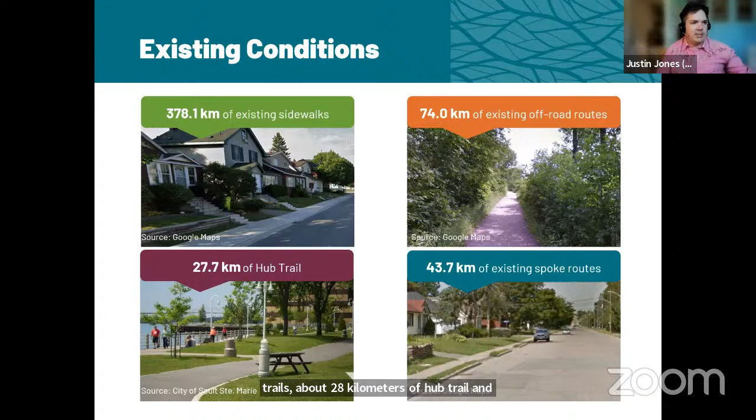I'll try to go quickly through, because I know you have a very busy agenda. We reviewed all of the existing conditions for the city and found there's about 380 kilometers of sidewalks, about 74 kilometers of off-road trails, about 28 kilometers of hub trail, and about 44 kilometers of spoke routes. Those are the kinds of facilities we're looking at in terms of existing conditions when we show the mapping here.

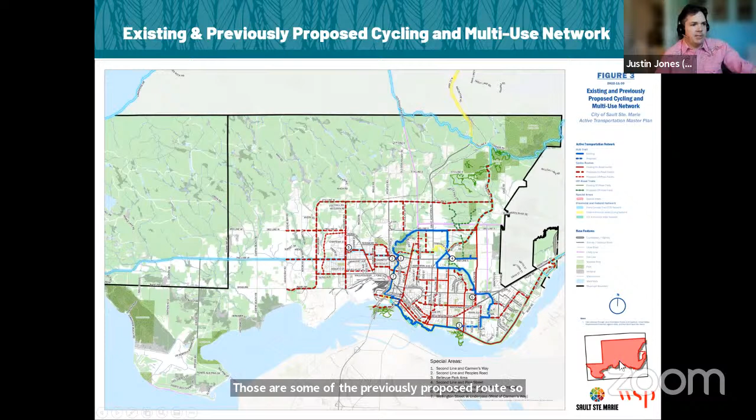This map shows an overlay of all the different types of facilities already in existence in Sault Ste. Marie, and the dashed lines show any of the proposed routes - some of the previously proposed routes, whether through the cycling plan or the transportation master plan, showing all of the ones that have been previously considered. We also show the previously proposed and existing pedestrian network. What you'll notice is that the pedestrian network is a little bit more well-defined and robust than the cycling network, which I think comes from the policy of the city when it comes to sidewalks.

In terms of the potential for active transportation in Sault Ste. Marie, we want to make sure that when prioritizing routes across the city for the active transportation plan, we're designing with safety and accessibility in mind first, creating connections and continuous routes, identifying routes that are feasible and actually constructible. We don't want to identify something that can never be built based on the constraints of the corridors. We want to support multimodal needs, connecting to transit facilities and providing space for all users, and we want to connect to key destinations. Those are really the key elements and criteria we're using to get to our candidate route network.

The candidate route network is twofold here - we're showing the pedestrian network first. This map demonstrates all of the different pedestrian connections and the proposed sidewalks that we are looking at carrying forward within the active transportation master plan, to better connect some of the existing sidewalks with destinations that are important to residents of the city, with a specific focus on schools.

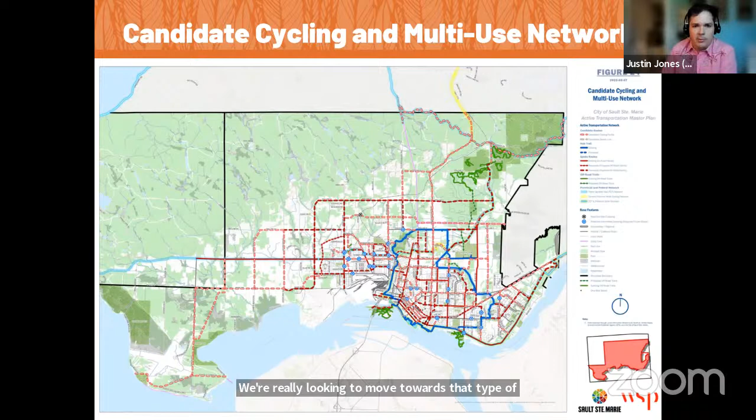So with that, I really just want to open it up to you and ask, is there anything that's missing? I know it's kind of like trying to drink from a fire hose when I do presentations like this, but I'm trying to fit everything into your agenda, so I'll leave it there for all of you.

Derek: This is Derek Lavalley, I'm a member of the committee. I just wanted to know, if there was a lot of construction at some point and we couldn't get around in our wheelchairs, is the trail—just because it says bikes—can a wheelchair get on the trails? If there was a barrier and I had to go around and there was a bike lane there, could I get on the bike lane, or is it just strictly for bikes?

Thank you for that question. One of the trends we're starting to see is more focus on what I'll call mobility lanes, rather than just bike lanes. For example, the most recent design guidance from the National Association of City Transportation Officials, NACTO, which provides design guidance for all of North America, has recently published a report called 'Designing for Small Things with Wheels.' The idea is that any wheeled mobility device—a mobility scooter, an electric kick-style scooter, a bike, an electric bike, a wheelchair, a powered wheelchair—those human-scale devices would be designed to be accommodated in those facilities.

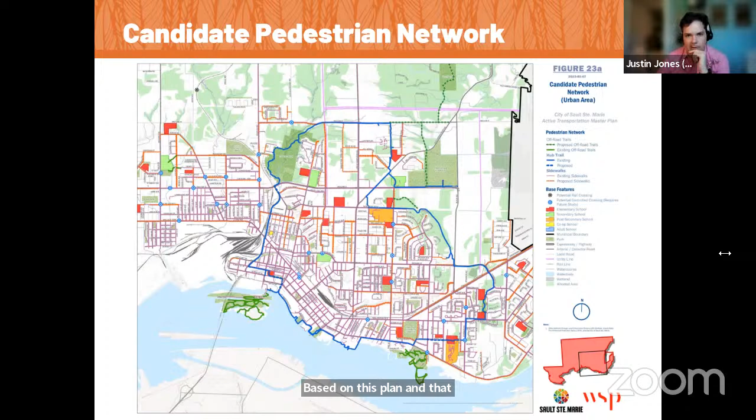So just to clarify, basically any sidewalk is going to be city responsibility, since those are within the municipal right of way. So it would be on the city for those investments, and that holds until you get onto the property of the school -- once you're on school property, that's where it changes. I know it's hard to see on this map, and we can circulate some higher quality maps for the committee after this session. But to be clear, if there was a school that didn't have a sidewalk leading up to it, we have essentially added sidewalks to every single one of them. There's not a single school that would be left without a sidewalk leading to it based on this plan. And that Sackville Road is included on our list already, just to circle back.

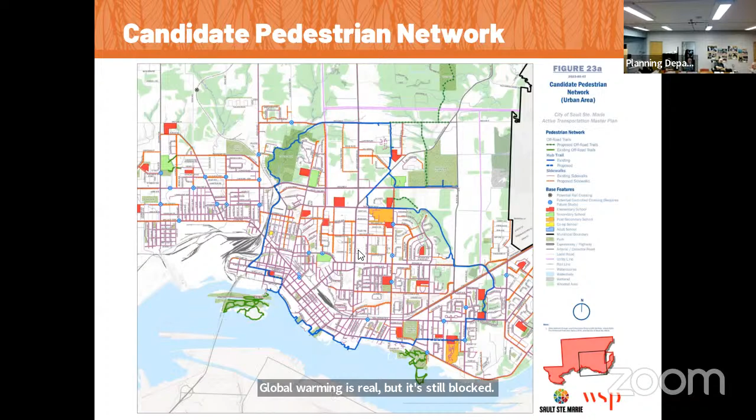Justin, general question regarding the plan and winter maintenance, snow removal. I know it's not what the recommendation... one of the things being in Northern Ontario, we have significant weather events fairly frequently, not as much as we did when we were younger. Global warming is real, but it still blocks part of the trail system, part of the sidewalks, the whole question of winter maintenance. How will that be dealt with within the plan? I know being a national company, you probably have weather concerns in other places, but this is something that we in the Soo still cope with quite a lot.

Yeah, and thank you for that question. That's one of the really key elements we want to look at as we go through this, in terms of next steps and what we're going to be doing. That's where it fits into this implementation strategy, talking about winter maintenance needs for the city. Our experience and the recommendations we usually craft into reports is for a municipality to start small, but really nail it when it comes to the level of service they're providing on winter networks.

So identifying a relatively small network of winter-maintained facilities, and having very high levels of maintenance service on those. Working closely with the operations department to determine where that capacity might exist, and ensuring a high degree of attention is paid to the conditions of those particular facilities. Then measuring, monitoring, and reporting back on how it's worked, and potentially expanding it out as more people start using it.

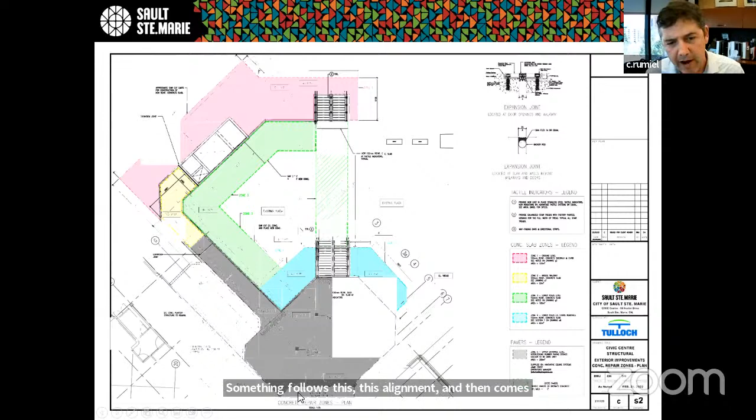So essentially, as City Hall exists right now, there's a long wheelchair ramp that follows this alignment, and then comes up the side of the building, and then another second accessibility ramp that goes to the front doors. The front doors are in this area right here. Everybody can see the arrow I'm circling.

So we are replacing that ramp - it does not meet current standards, Ontario Building Code or AODA. It's too steep to replace the ramp to a standard that would satisfy that. It would probably have the ramp ending somewhere past the flags in the front yard there. So we had to come up with a different solution.

So this right here is an exterior elevator. Essentially, we'll talk about 3 different elevations that the end product is going to look at. We have the parking lot elevation - leave a vehicle in the parking lot through a wheelchair ramp.

This is the lower vestibule of the elevator. You'll enter the elevator from this side. This is the elevator here, and then at the upper level - you'll see this better in the renderings - you'll leave from a second vestibule entering at what I'll call the Civic Centre second floor elevation.

So this elevation will be - there's no grade leaving here, there's no ramp. It's just one elevation straight into the building, where you'll meet security and determine where you need to go in City Hall, get on the elevator and go down to the next elevator and go to where we need to go. So that's how we're improving accessibility.

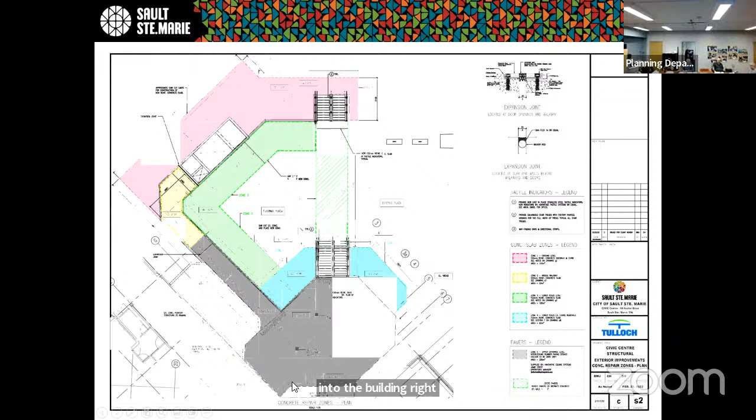So there is actually a set of stairs walking up into the building right now. This whole platform here, this elevation, will be the same as where you'd leave the elevator, and be raised, so that the last 4 steps, I believe, into the building are gone, will be gone. As well, on the lower platform level here, it'll be resurfaced with the existing stamped concrete, and the paving brick will be removed and replaced with new. The lower stairs will be replaced with galvanized stairs matching these ones. And that's essentially the project.

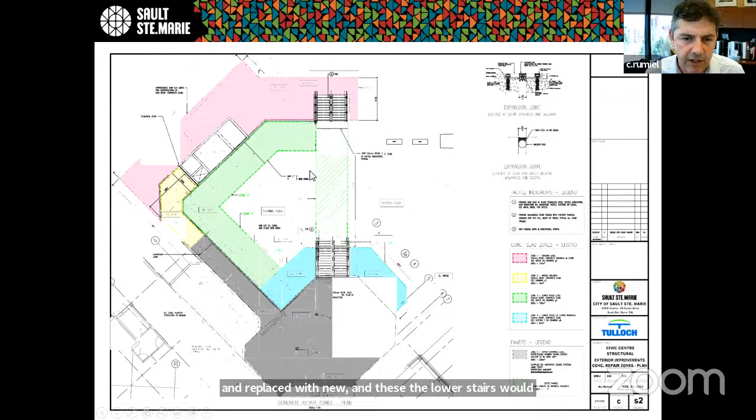So you see it a lot better in the renderings. You can see this would be the parking lot elevation right where I'm circling. These stairs are galvanized stairs with decorative railings up to this elevation here. There's a wall here keeping people on this middle platform from - it's quite a fall right here.

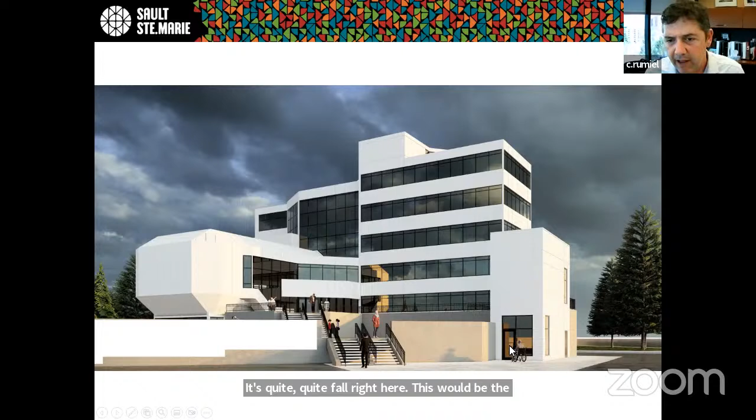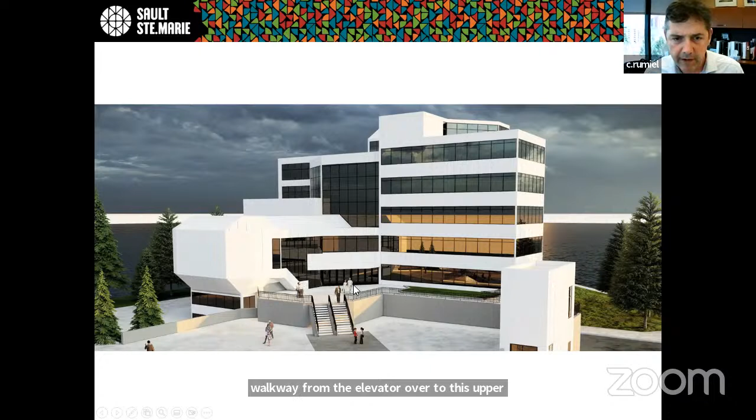This would be the entrance to the lower vestibule of the elevator, into the elevator up, and then exiting up. Secondly, you'll see that better in the next couple of renderings - it's just a little bit higher look. You can see the walkway from the elevator over to this upper platform area, and there's no last 4 steps going into the building here at the doors anymore.

So you get a sense of what it will look like. Looks a lot different without this wraparound set of concrete steps that we're continually putting a new coating on.

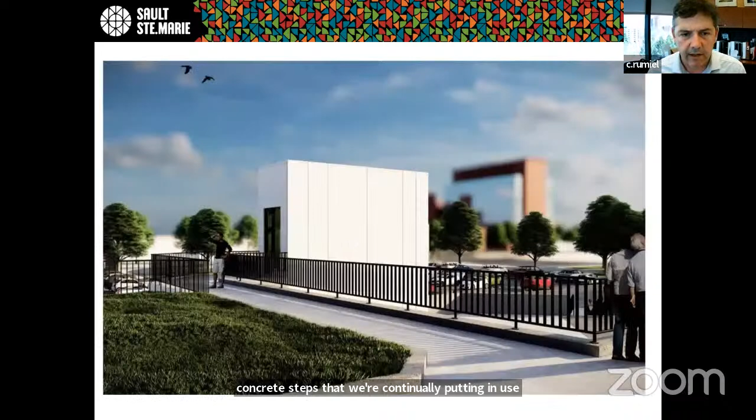And this is the exit from the upper vestibule of the elevator building. You walk through - again, this will be raised, the 4 steps that currently you'd have to walk up to the entrance. So this is all at 2nd floor elevation, so there's no bump entering the building. You just go from exiting the elevator, straight into the building.

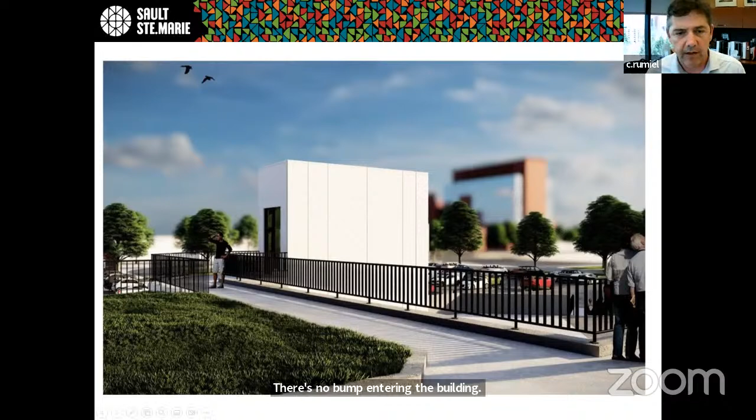This elevator building is a fully climate controlled, heated building. There's an entrance from the parking lot elevation to the upper platform elevation, with an automated door to get in and out of it. It's got the same exterior ACM panels that are on the Civic Centre now, so it will completely match.

And that is essentially what we've awarded last night. We have a couple of committee members with questions. Did you know that now most new elevators are voice recognition? Basically what they do is have a computer voice that tells the person where they're going, whether they're going up or down.

So when we get the elevator, if we can look at getting voice activation, as soon as you step in it'll tell you where you are and keep telling you the number. So if I'm on the first floor, it'll say ground, then it'll say number 3, 4, 5, 6, 7, 8. It also says to people, like if the wheelchair's hitting the door, it'll say please move from the doors. The hospital already has one - it's voice synthesized, so every floor we go on tells us.

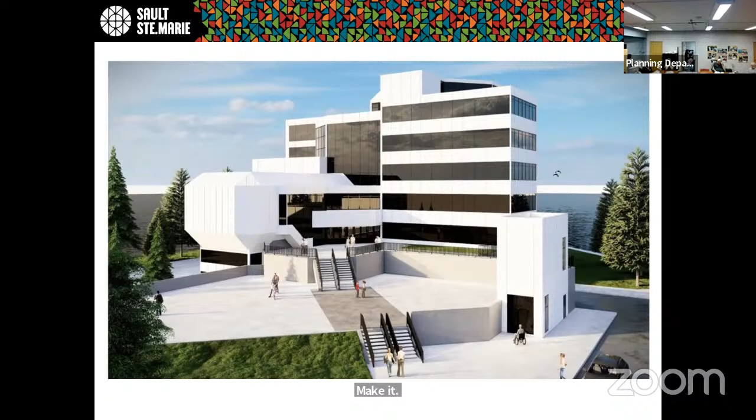So this elevator is heated, so they should be able to put the buttons or whatever to make it work. But I think when you say voice activated, Derek, is it when you push the button it says something? Yes, I think it does the same thing - it tells you it's going up. If I press 3, it tells me I'm on level 3.

And I believe, Carl, correct me if I'm wrong, this elevator only has two floors - it's either going up to the second floor or down to the first. Is it a lift or an elevator? Good question, I believe it's an elevator. I believe it's a hydraulic elevator, but I don't know, it's a little bit out of my wheelhouse, the elevator concept and construction. I'd have to check with the designer. Okay, now I've got a clearer picture of it.

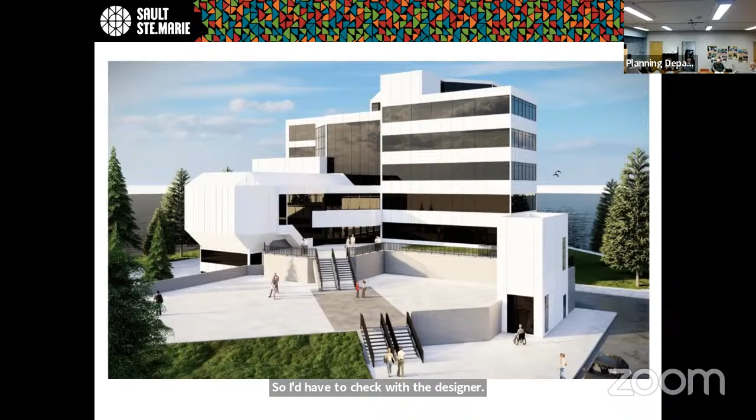I just wanted to reiterate what Carol said, which is, in selecting the final finishes, there should be some contrast so you can see where the panel box is with the push button, and also some contrast between the floor and the walls. That's probably a finishing issue, and we'd like a level of contrast for those.

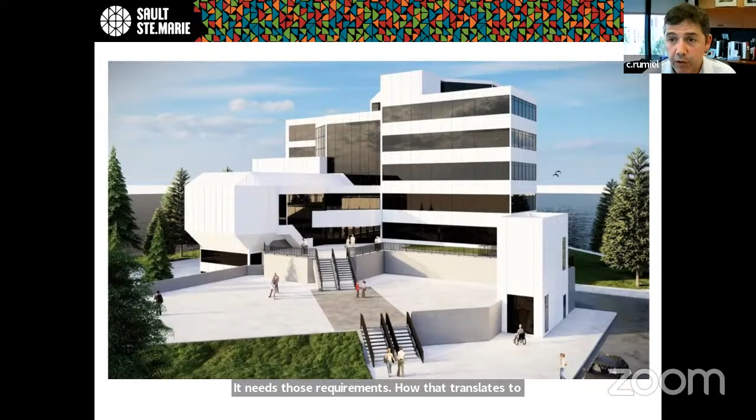As Peter said, everything was designed for section 3.8 of the building code and FADS. It meets those requirements. How that translates to the elevator and the fit and finish, I'm not sure, but I can review that. If something has been missed, or we can add something on relatively easily, we can do that before the contractor orders it. We just got approval last night, so.

Carl, if it's helpful, we can send you an email to that effect, and then you can forward it and see what the response would be. Yeah, I'll get some answers on the specs of the elevator. I suspect it's going to do most of these things, but I don't know for sure. Yeah, that would be good.

Craig, you have a question? Just a two-part question. On the entry to the City Hall main doors, now that we get to that level through the elevator, is there an actuator on that door present? Because I usually go through the west entrance. Automatic, oh it's already picked. Thank you. And will the west entrance be maintained? That's the one we presently use where the Parabus drops us off. I use City Hall often, as we both use it for the municipal elections and so forth.

So that other entrance will still be available? I think, and Carl, correct me if I'm wrong, like right now during a busy event like the elections, they'd probably have somebody at the west entrance because there's enough people coming and going that it can be a bottleneck. So for really busy events, you'll still be able to go through the west entrance and somebody will be there, because there's a door there now, right? It's locked and you need to pick up a phone and get somebody to come down. But going forward, I think this is the entrance that they want everybody to use.

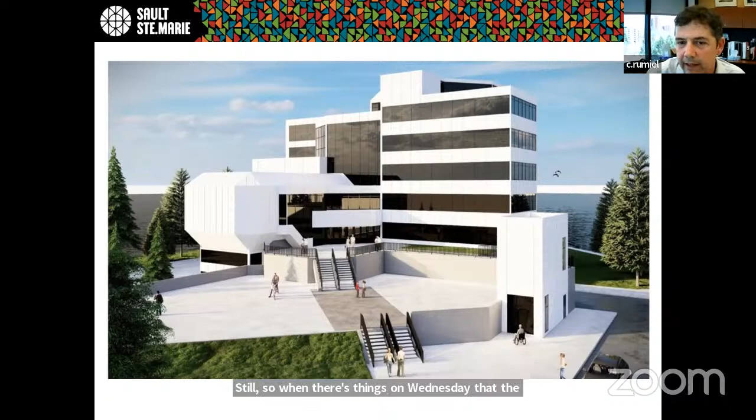Exactly, like I was thinking, after 9 o'clock or so, if you have committee meetings and events and security doing more regular routine checks, I would highly recommend having the elevator closed at that point. There's going to have to be consideration even for staff members who may have mobility issues. Don McConnell used to work at the city and he'd come in every Sunday. So there's going to have to be some way to contact security from that lower vestibule of the elevator.

Agreed, thanks Carl. Other questions or comments? I really like it, yeah, it's going to be good. It'd be nice to be able to go in the front door.

Carl, I have two questions myself. One is, do we know the size of the elevator? I'm just concerned because we have really large motorized wheelchairs, and for some individuals, is it a big elevator or a little elevator? You know what, Don, I could pull the drawings out right now and scale it, but how about I summarize that and give you guys the actual dimensions in response. I know it's been seen by the architect as big enough, so.

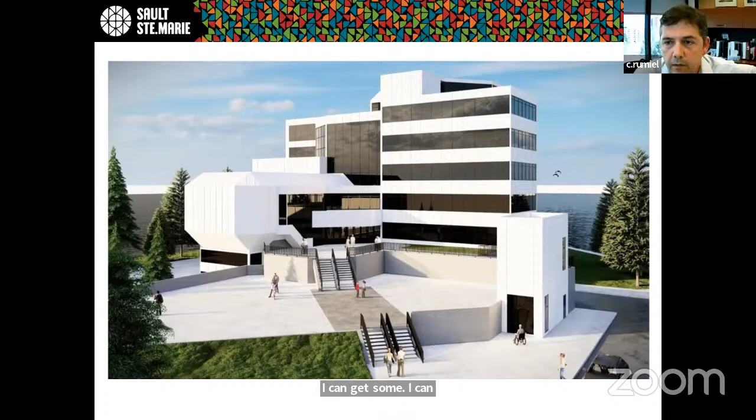My other question is, and I know there's a budget problem, I recognize that, but this is costing way more money than everybody thought it was going to. It seems kind of strange that we bring people into a heated, climate-controlled environment, bring them up in the elevator, and then put them back outside in the rain. Was there any thought to putting in a covered overhead walkway, so people getting out of the elevator walking to the front door of City Hall would be covered?

Yeah, we did look at that. It didn't make the final cut, just because of the distance from the elevator to the front door. There would be an opportunity at some point to put something in after the fact, just to break the wind, partway maybe to the exterior foyer. It's something we may look at in the future, but it didn't happen, not only for cost reasons, but it's a long distance and might look awkward, and it would cover up those nice new windows on the second floor that CSD looks out of now. I was thinking just a clear plastic covered canopy sort of thing.

Yeah, it's just a thought, for sure. Okay.

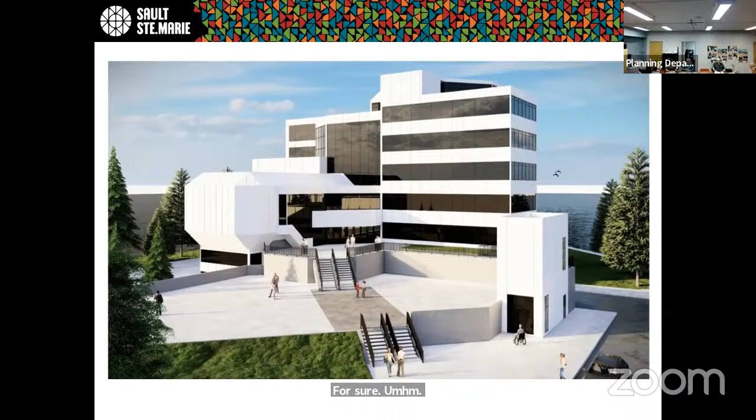Someone's going to have to get out and shovel it and keep it free of ice, right? Yeah, maintenance-wise it will be a challenge to keep that shoveled for sure.

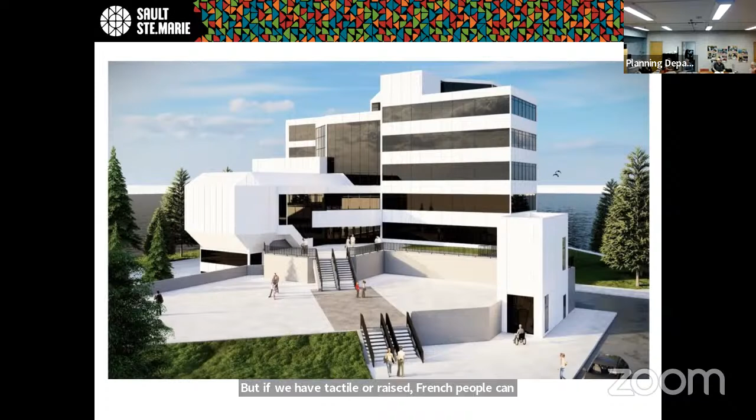Dan? Thanks, Carl. Just a couple of comments for accessibility. This is going to be new and it's going to take time for people to get to know this, so we'll need some signage, preferably signage that has braille and tactile markings. Some people read braille, it's not as common as one would think for people with vision disabilities, but if we have tactile or raised print, people can feel it and figure out it's the elevator. So that would be very helpful.

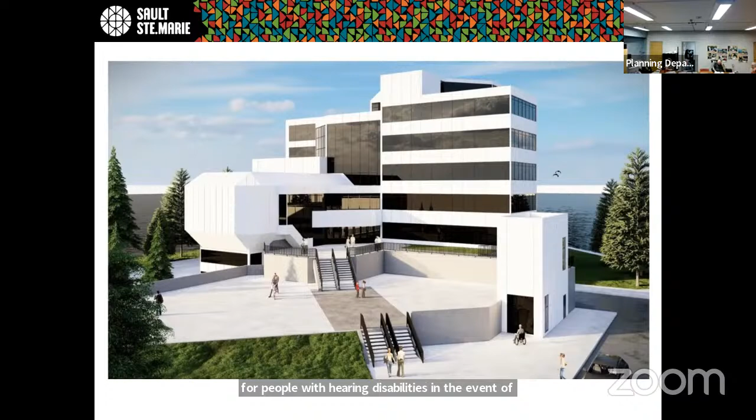The other thing I've just recently heard about is for people with hearing disabilities, in the event of a failure of the elevator, they can push the button and something happens where they can actually communicate with the other person via text. I'm not sure, but I think that may be part of code these days. I'll just add that in, if that's something that can also be looked at as well, okay?

If you guys are sending me a list, that'd be great. I could work with that and go get the answers you guys need.

That came up at council last night too. Councilor Collins as well, who I think sent us an email about this, more about the button, like the help button. Yes, we'll send you a list, Carl.

Thank you very much. I think I'd rather be stuck in this elevator than an inside elevator some day. I was stuck in an elevator last week. Oh, good thing I had my cell phone on me.

Is there anything else, or any comments or questions for Carl?

Carl, before I let you go, sorry for the incredibly short notice of about 3 seconds. I noticed that there are renovations going on in the lobby itself. Could you talk about those for a minute?

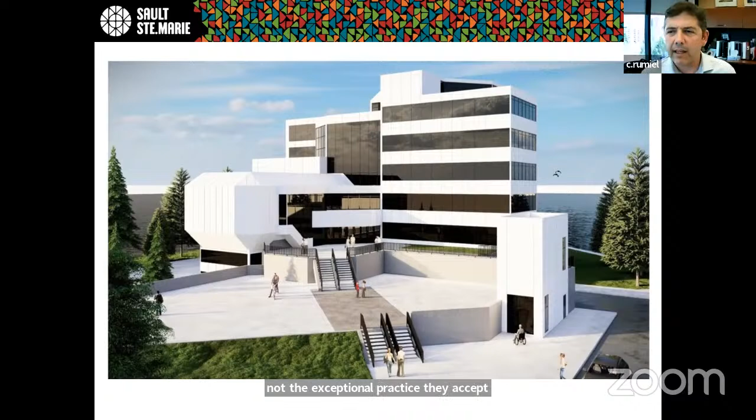It's been relaxed a little bit. You could probably find your way up to my office now, but you'd have to speak to someone at security. They would verify that you're coming to see me, and somebody may have to come down and meet you. But gone are the days where you could just walk right in those doors unannounced to the mayor's office, for sure.

But if I'm coming in and I want to speak to somebody in engineering, building, or planning, by and large, they're going to come down and meet me in the lobby, right at a desk.

And what my question is: have those facilities, the desks and so on that are being provided for the public at that point for the meeting — are they designed to be barrier free?

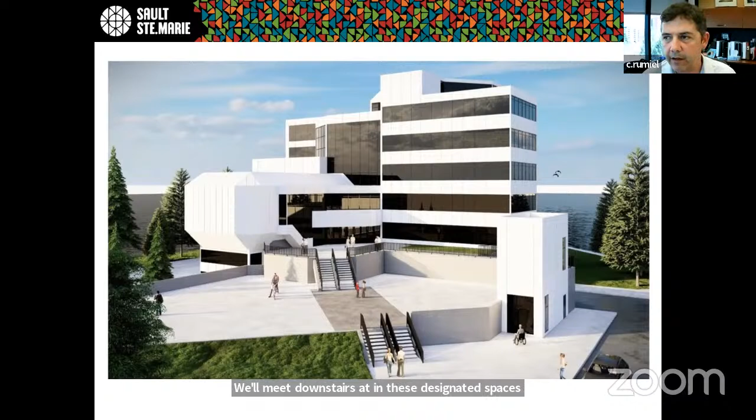Yes, absolutely. A great example is people coming in to go over their plans, applying for building permits, that kind of stuff. Building staff will meet downstairs in these designated spaces, and they are barrier free. They meet the same requirements we were talking about.

Thank you very much. Anything else for Carl?

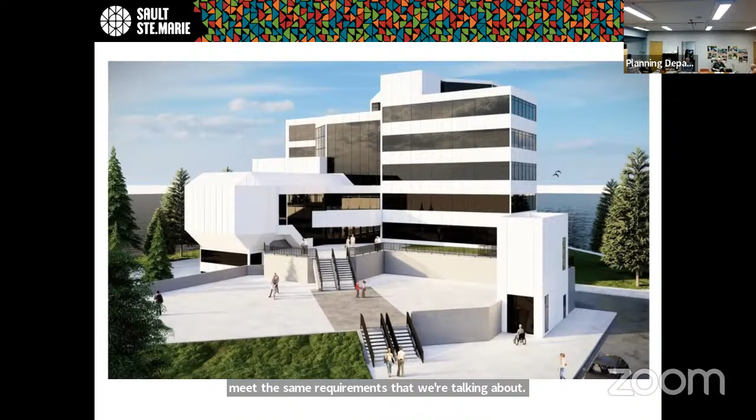Thanks, Carl. I appreciate you taking the time to meet with us, and we're looking forward to an in-person tour of our new elevator. What's our timing on this?

What's the timing on the new exterior elevator? The completion date is in December of this year to get all of this work done, so we should start seeing some action pretty soon. There's quite a bit of work for the different trades.

There's an electrical contractor for the elevator, and the concrete demolition is substantial, so it's going to take some time.

Okay, perfect. Well, thanks very much. No problem. Thanks for having me, guys.

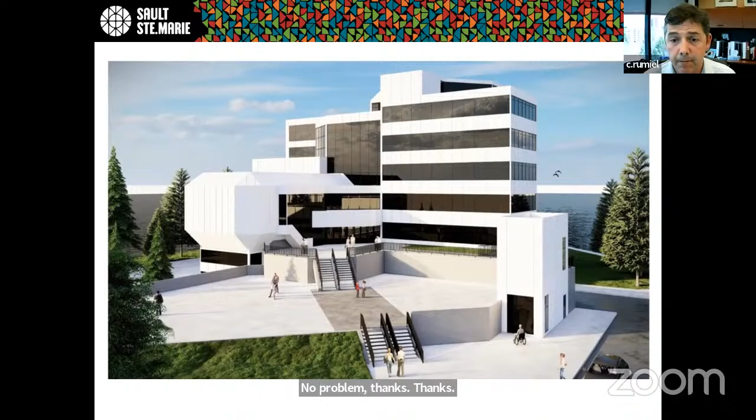I would just like to add, we're trying to get better at consulting with this group on these types of major infrastructure projects. I don't know what the consultation was a year ago or further — I think Diane, you and I both had different people sitting in our chairs. But we'll try to do better and talk earlier in the process than the day after council.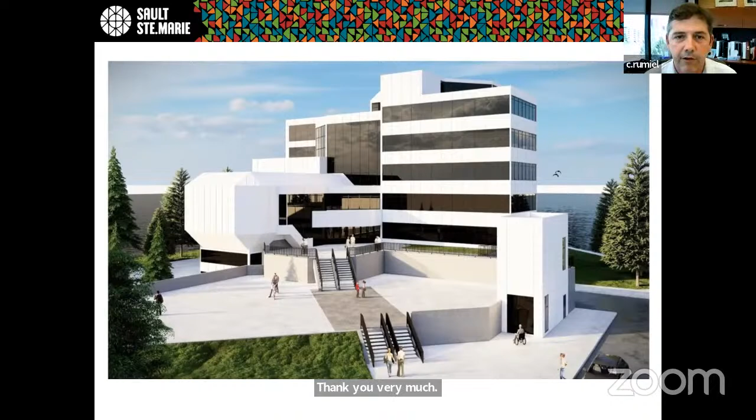Thank you, Carl. We really appreciate the effort that'll be going into that. Thank you very much. Okay, have a great rest of your meeting, guys. Thank you. Thanks.

Don, you said the change — having wandered into City Hall a couple times, never been to the mayor's office, but I've wandered around there. The mayor's office is not accessible, by the way. I didn't know that, yeah. That we knew.

Mr. Chair, I would like to publicly thank our city councillors last night, CAO White — he wrote that for us and said, hey, our disabled community just wants dignity and respect. And our councillors did the same thing, so I just want to publicly say that. Thank you guys for putting that forward, because we were watching it and I didn't think it was going to go through. So if you can send a letter of thanks to CAO White.

For his... but come on, guys, we need to make Sault Ste. Marie better for the community, so. I think that's a great idea, Derek, and Steph, can you note that in the minutes?